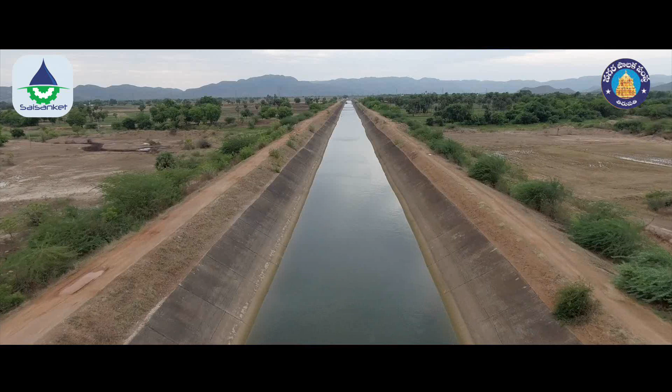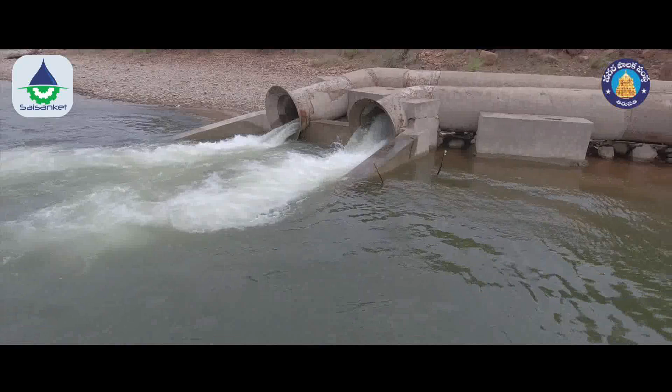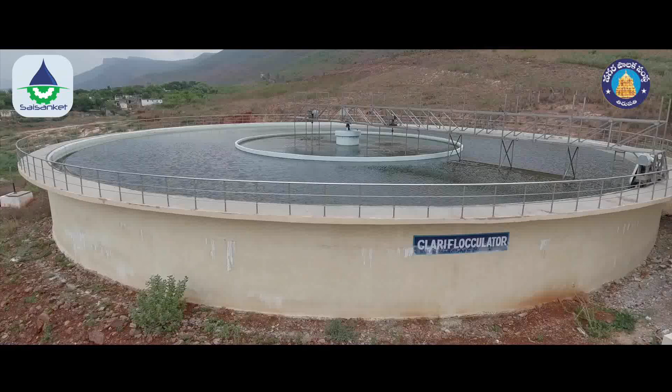The primary source of water supply for Tirupati Municipal Corporation has been Satyasai Ganga Canal, a non-perennial source located about 40 kilometers from the foothills of Tirumala. Water from this canal is pumped and stored in Kailasagiri Reservoir, about 2 kilometers away from the canal. Raw water from this reservoir is then brought to Mangalam Water Treatment Plant located near the foothills of Tirumala through a series of pumping and gravity mains.

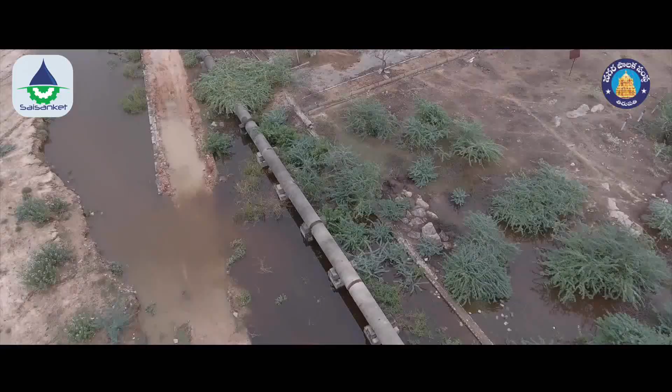The original design capacity of the raw water pipeline was 63 MLD. However, the average carrying capacity of the pipeline has been dropping steadily over the last few years for many different reasons. Loss of carrying capacity on the raw water pumping side has severely affected supply of treated water to both residents of Tirupati and pilgrims of Tirumala Tirupati Devasthanams.

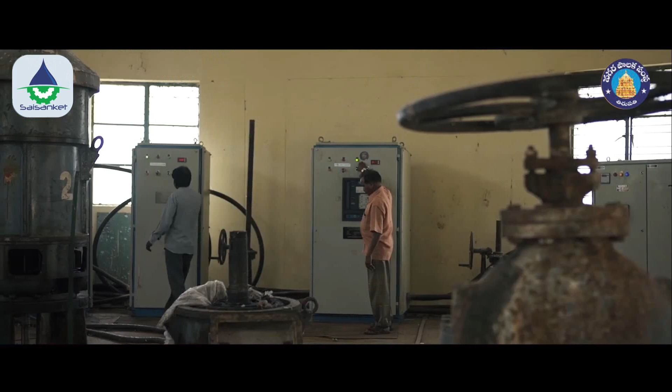The main reasons for the loss of carrying capacity are frequent leakages or burst conditions along the pipeline, breakdown of pumping machinery, and air entrainment from the periodic filling and draining of the pipeline. Frequent leakage and burst conditions in turn are due to lack of a proper surge protection system, inefficient check valves, also known as non-return valves, and absence of non-slam air valves.

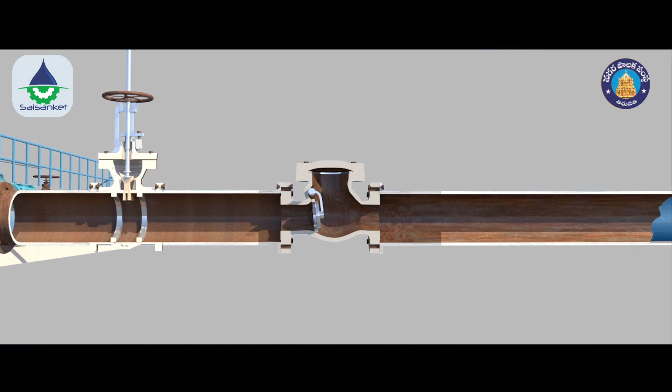Inadequate surge protection system. Every time the pumps trip, the water column slams on the check valves, both at the pump station and along the pipeline. When slam pressures exceed the pipe pressure rating, a leakage may develop or result in a burst condition. In addition, repeated occurrence of slam pressures can progressively weaken the pipeline and lead to subsequent burst conditions.

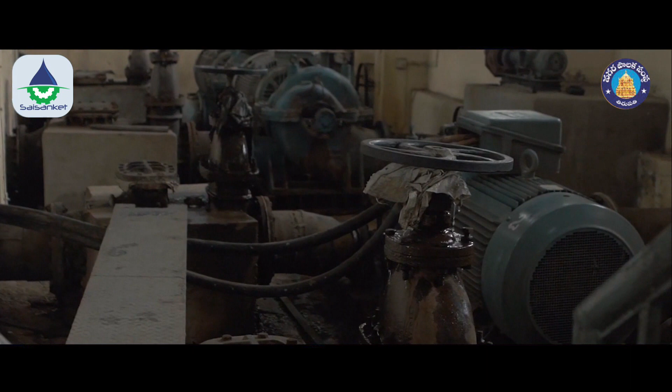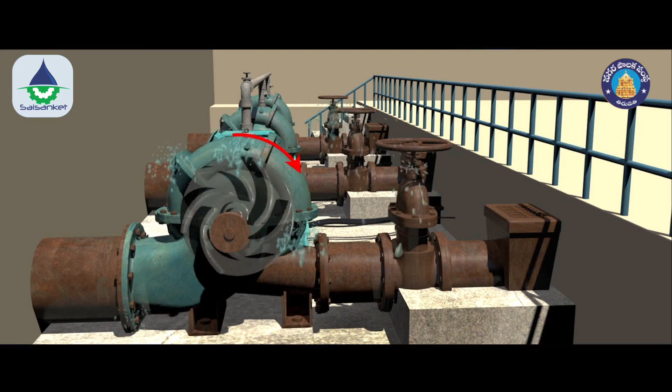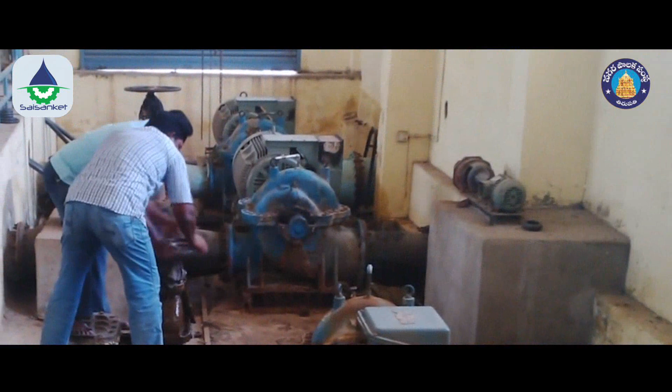Damaged check valves. Conventional check valves get damaged over a period of time due to repeated occurrence of surge pressures. Once check valves stop functioning, there will be heavy backflow through the pumps, resulting in vibration of pumps, loosening of seals and eventual leakage of water within the pump station. The damage can be huge if the operators do not react within 1 or 2 minutes and close the valves.

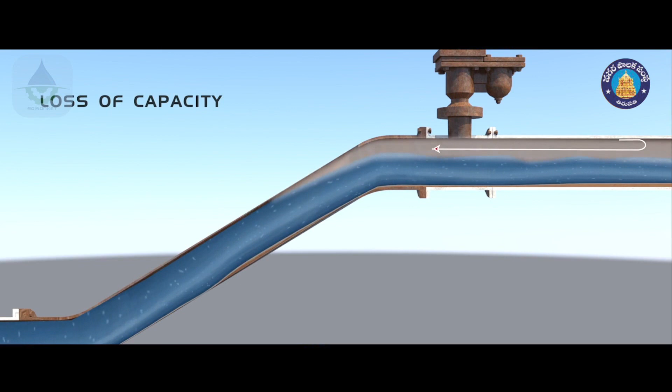Periodic filling and draining of pipelines. Failed check valves and periodic pump trip events result in frequent draining of the pipeline. Ordinary air valves cannot release the air efficiently, and air gets entrapped in the pipeline during subsequent pump start operation, leading to severe loss of capacity. Ordinary air valves will also result in air slam conditions, and resulting high surge pressures can generate leakages or burst events along the pipeline.

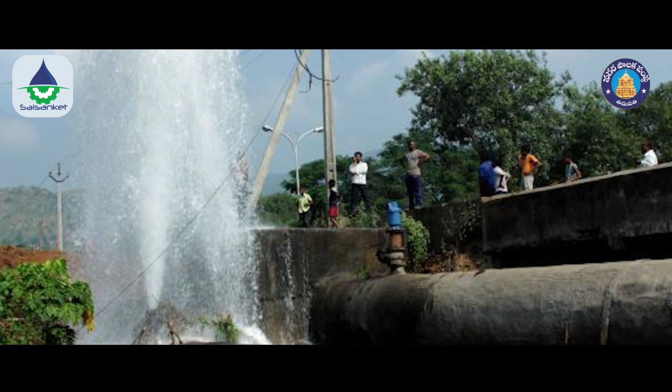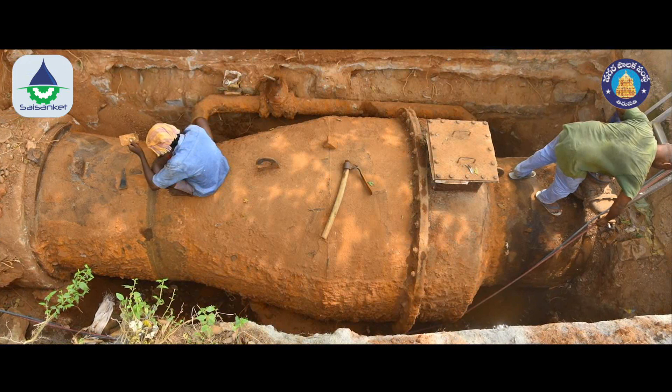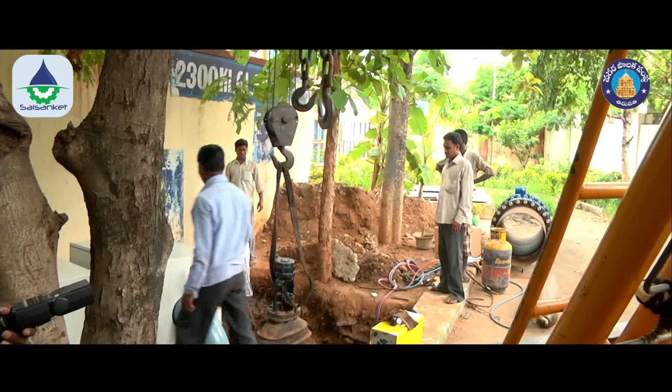Frequent pipe burst conditions. Every time a pipeline bursts or a major leakage is developed, it takes anywhere from 6 hours to 1 day to fix the problem and restart the pumps, causing a disruption in treatment of water and supply of water to consumers. Pipe repair works call for emptying of almost the entire pipeline, and the draining process takes a long time and is often accompanied by loss of precious water and damage to nearby crops.

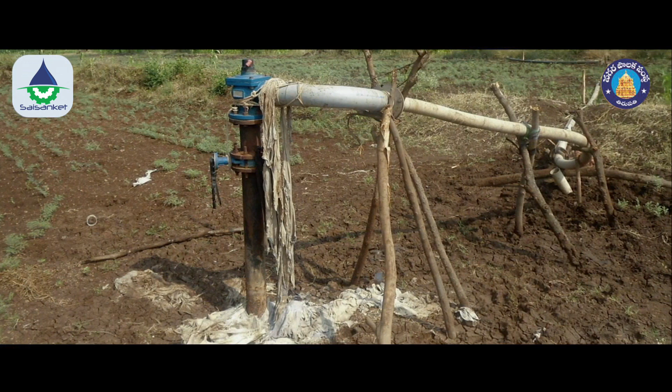Exposed air valves. The conventional air valves are exposed to people who tamper with them and steal water. The air valves may also become non-functional, which will have a negative impact on the hydraulics of the entire scheme.

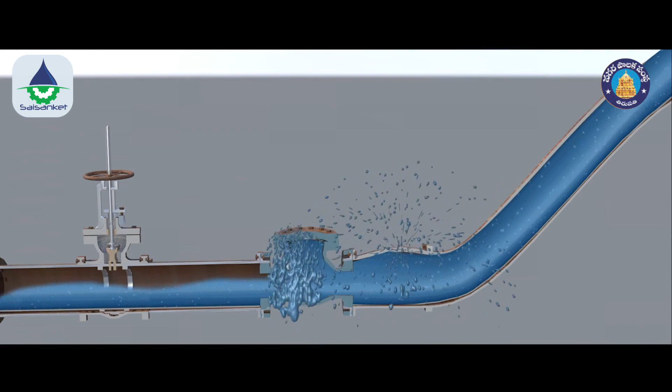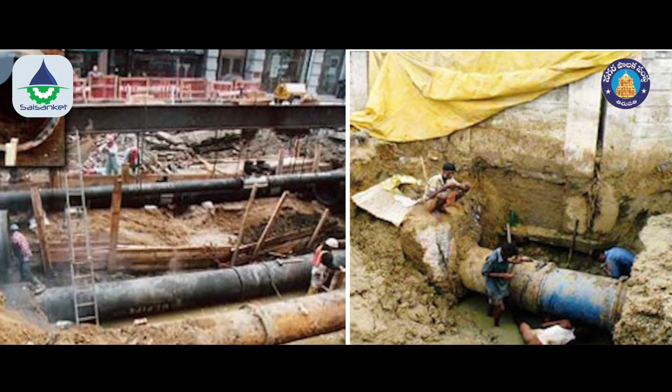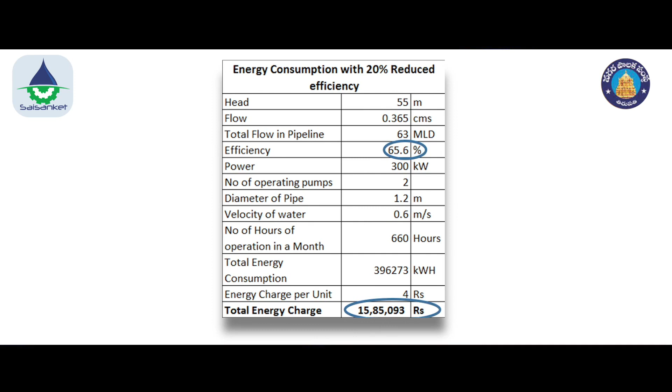These problems are not unique to the Tirupati water supply scheme and are faced by almost all water supply systems in India. In addition to rapid deterioration of water supply infrastructure, loss of capacity increases the pump energy costs. For example, a 20% loss of pump and motor efficiency increases the energy costs by more than 2 crores each year for Tirupati Municipal Corporation.

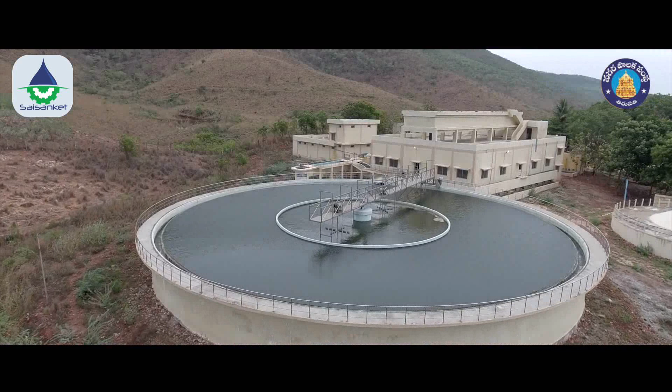The water treatment plant at Mangalam is in very good condition and can treat water at full design capacity once the raw water side of the system is rehabilitated. Treated water is then distributed to various ground level and elevated service reservoirs within the corporation limits, and from there to individual consumers. There are problems associated with distribution of treated water as well.

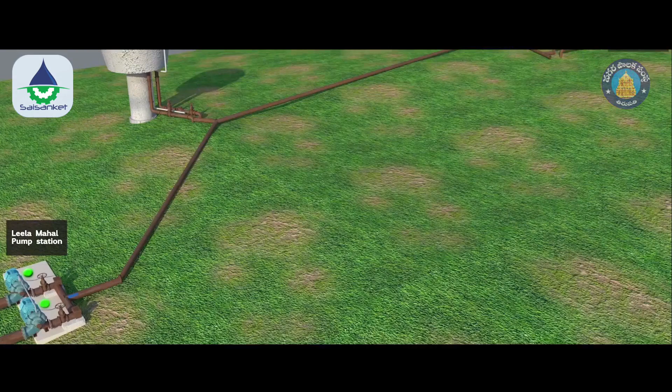In the stage of bulk distribution of treated water, achieving equitable distribution of bulk treated water to ground and elevated service reservoirs is almost impossible, and the traditional method of manual throttling is a very tedious process. No matter how well a system is designed, the inevitable variation in residual heads will distort flow of water into each reservoir,

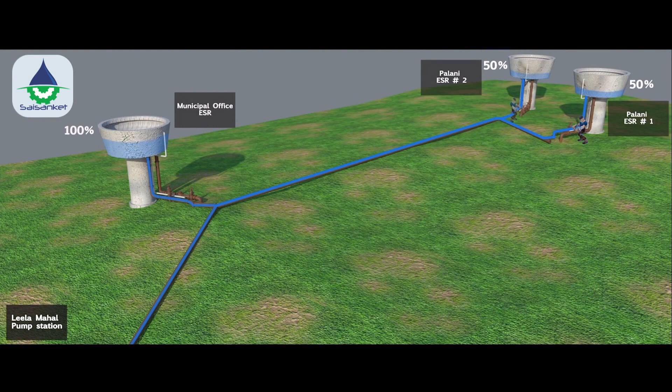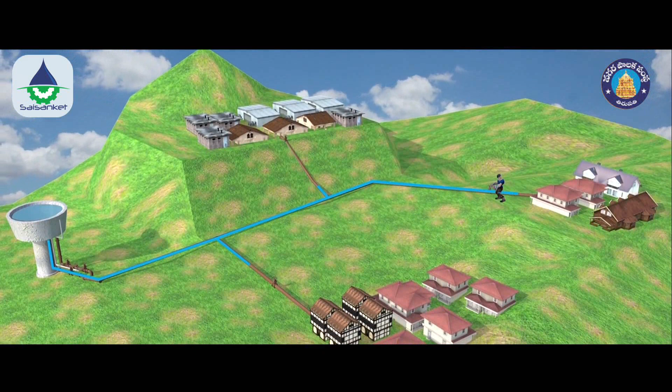which results in inequity. In the stage of supplying water to households, once again, inequity will set in, as flow of water to various households is dictated by gravity and hydraulics. The supply process is done manually, which is also a reason for unequal distribution.

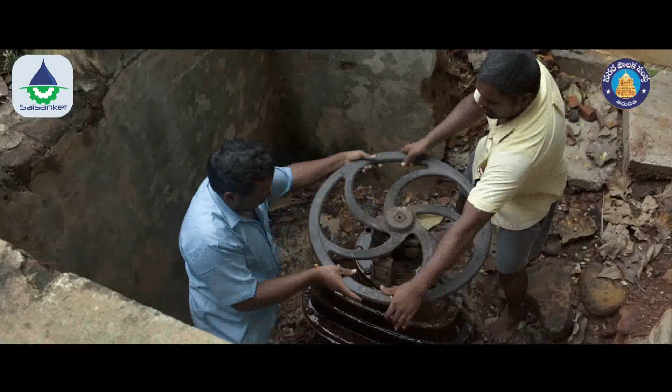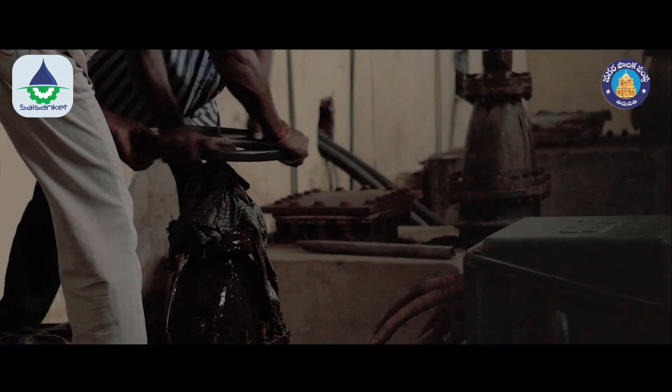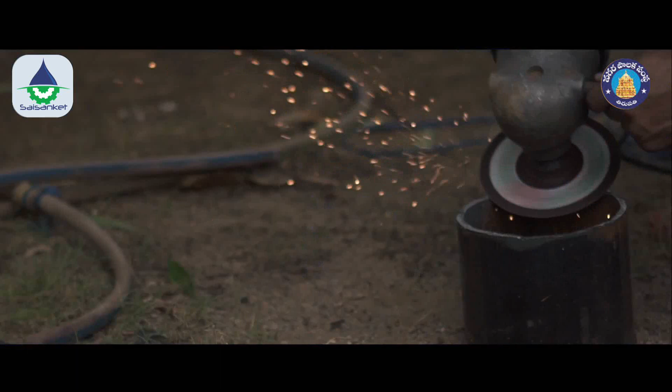Manual operation. The entire scheme is operated and managed manually by untrained manpower and hence mismanaged, leading to many failures of pumps and pipeline. Every failure leads to considerable downtime for repairs and maintenance, resulting in disruption of daily water supply and recurring unexpected and unwanted expenses.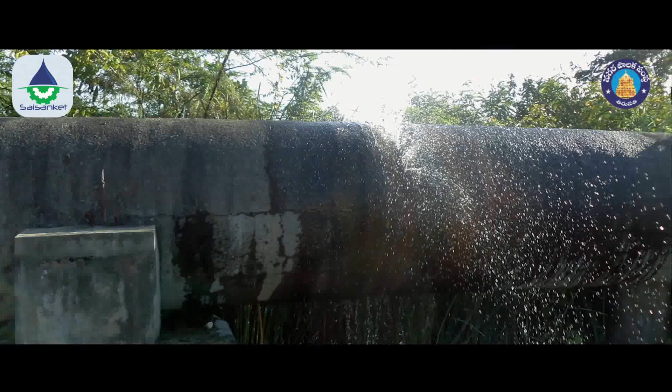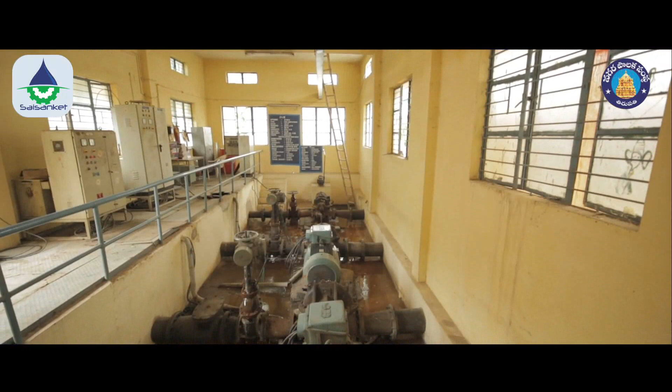Though the pumping machinery, surge protection system and some segments of pipelines are in badly deteriorated condition, the overall water supply infrastructure is still very valuable and should not be abandoned. Instead, a good rehabilitation program can unlock the value of existing infrastructure and strengthen the water supply scheme to original design capacity at a fraction of the cost of building a new water supply system.

Tirupati Municipal Corporation and the Public Health Department have taken up the task of complete rehabilitation of the existing water supply scheme with an aim to restore full carrying capacity of the raw water system and enable assured and equitable distribution of treated water. The rehabilitation work was also based on the most advanced and time-tested technology from around the world in order to prevent rapid deterioration of various components in the future and minimize operational energy costs.

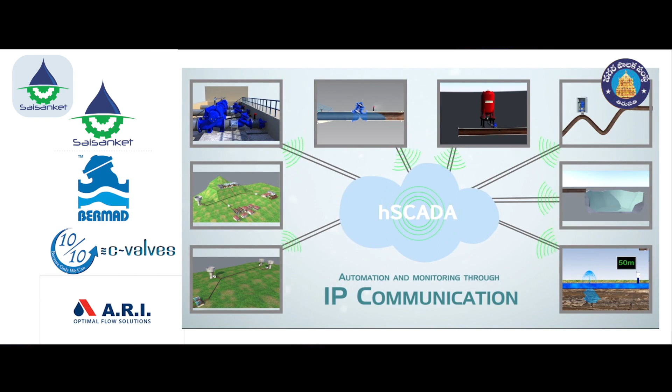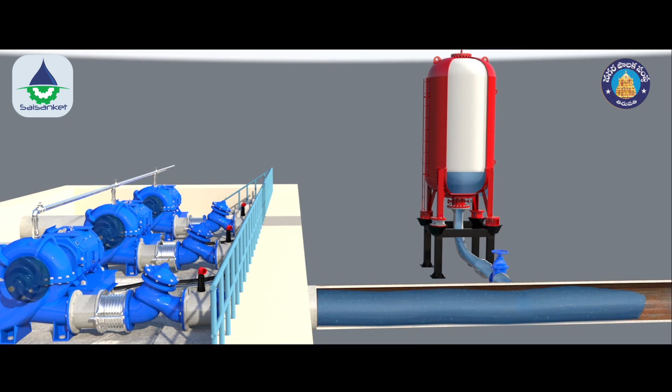Solutions to the main problems pertaining to the existing system are bladder vessel-based surge protection. These maintenance-free devices provide excellent compressed air-based surge protection for pipeline systems. They protect pipelines from both extreme low pressure and extreme high pressure conditions, thereby preventing future leakages and burst conditions, as well as enhancing the life of pipelines.

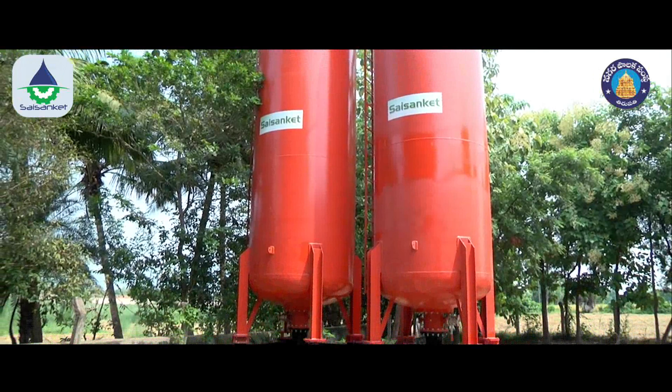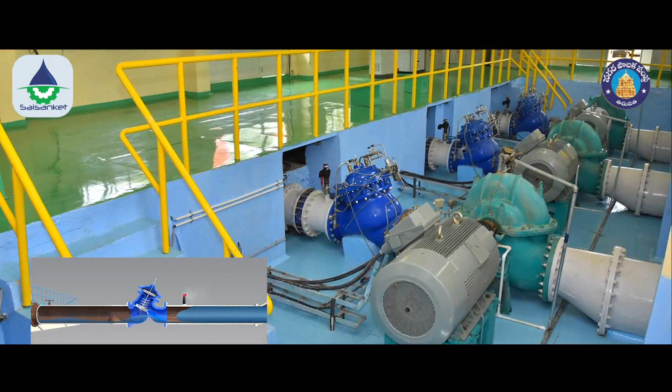Pump control valves in place of check valves. State-of-the-art Israeli pump control valves will replace the check valves to help with smooth starting of pumps and automatic stopping of flow reversal when there is power failure. The sturdy construction of pump control valves makes them fail-safe even under extreme operating conditions and prevents the need for the operators to run and close the isolation valves. Since there is no slam condition, all equipment within the pump station is very well protected and pumps will continue to operate at high efficiencies for a long time.

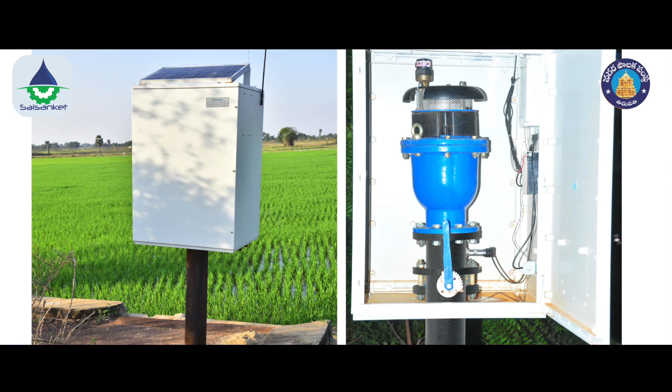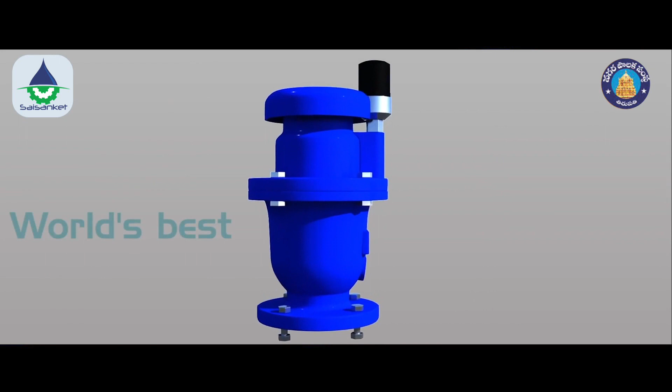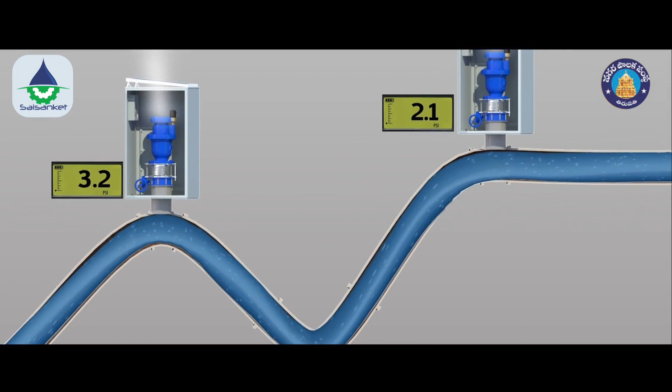Enhancing carrying capacity of the pipeline. Preventing entrapment of air along the pipeline is the key to maintaining high carrying capacity of the pipeline. The rehabilitation work employs the world's best Israeli air valves from ARI that will provide a fail-safe mechanism of removing residual air. In addition, the rehabilitation work involves continuous monitoring of the health of air valves, so preventive maintenance work can be undertaken in case of necessity and keep the pipeline in healthy condition all the time.

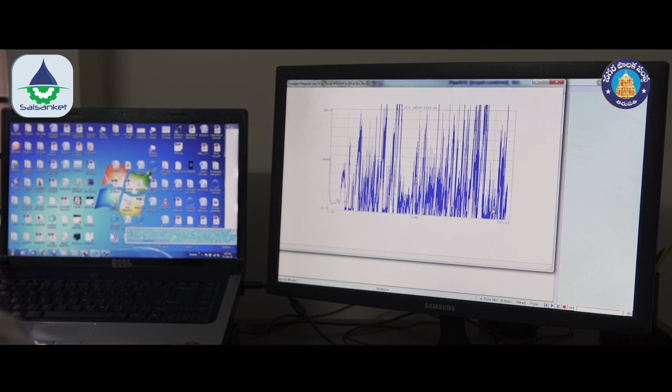Prevention of pipe burst conditions. Pressures will be monitored at each pump station using high-speed data loggers, and that data will be analyzed periodically to determine the potential surge problems. This will address the problems right away before they get worse, thereby preventing future pipe burst conditions.

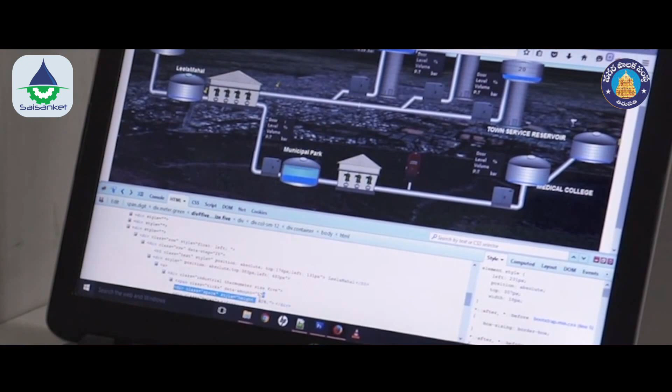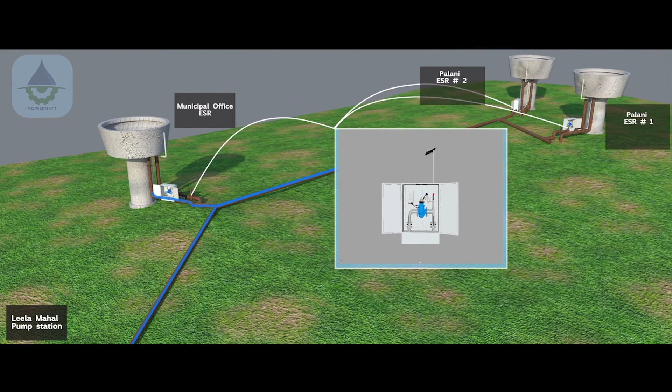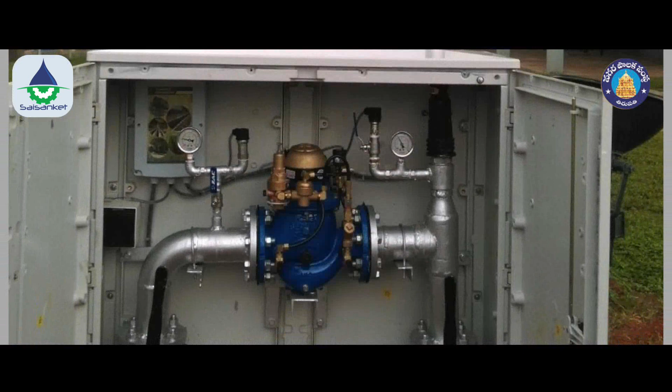Overcoming the inequity in distribution of treated water: installing a Reservoir Management System (RMS) at the inlet side of each receiving reservoir, which automatically shuts off the flow into reservoirs once a designated quantity of water is delivered to that reservoir. And for supplying to households, usage of zonal control valves based on an energy-less hydraulic solution called WDMs, which are set to deliver a certain flow rate and volume for a designated time period. This will facilitate 24/7 supply over a period of time.

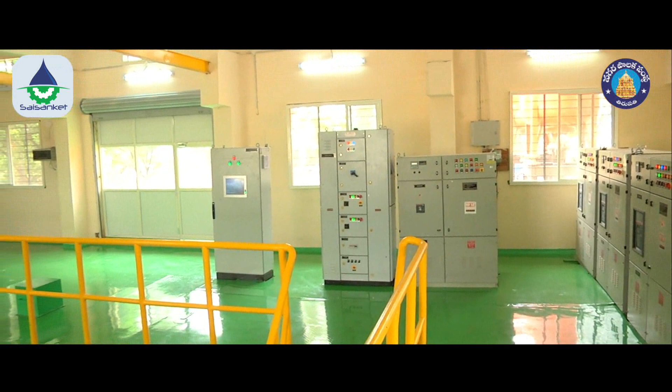Reduction in operating energy costs. Replacement of pumps to bring back full efficiency and replacement of electrical panels for synchronization of pump station operation, which results in reduction of operating costs of energy and maintenance.

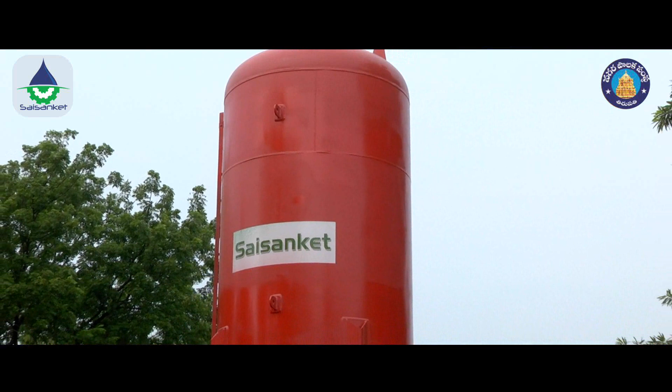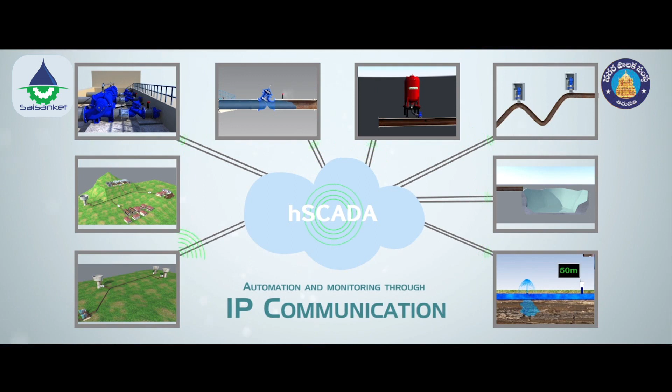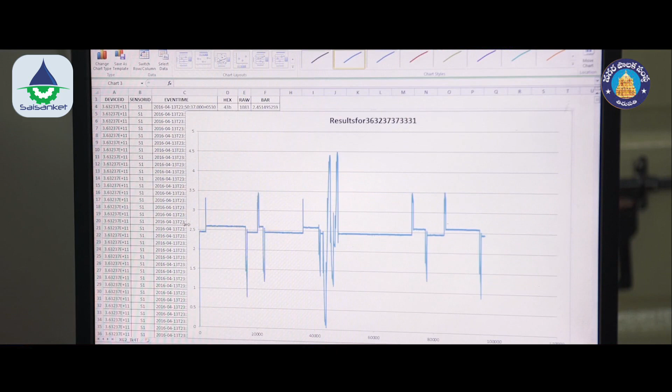Overall project management through continuous monitoring and control. For efficient operation and maintenance, all critical components of the system such as bladder vessels, air management system, and reservoir management system are connected to a smart network. The officials will be able to see the system working on their computers and smartphones and will be receiving alerts, intimations, and on-demand access to historical data. This allows for informed decisions in cases of vandalism, pipe leakage and unintended deficiencies in the system in real time.

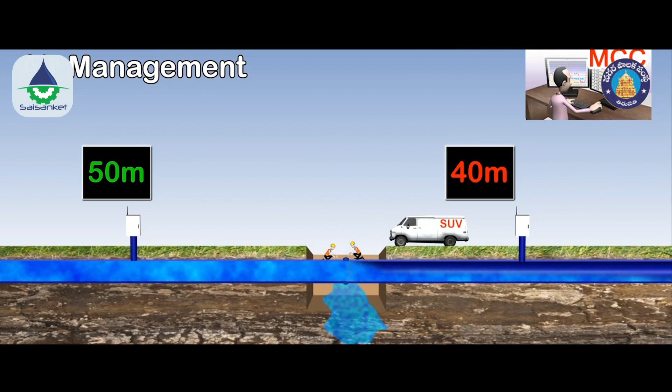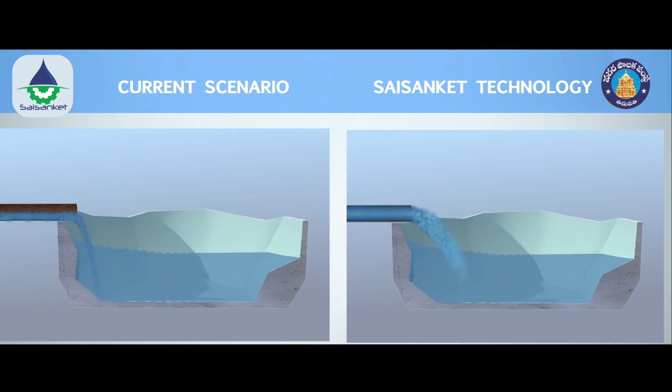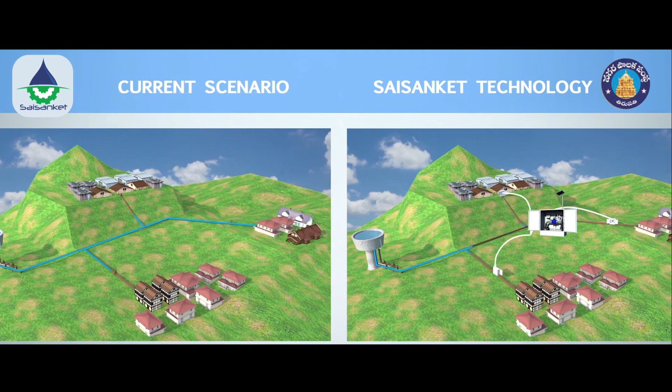With these best water management practices, state-of-the-art technology solutions and smart network tools by Sai Sanket, the Tirupati water supply system can be restored to original design capacity at a fraction of new water supply system cost. These changes will also ensure long-term trouble-free operation. The post-rehabilitation scenario will be a reliable water supply scheme that is fully automated with improved efficiency and assured water supply to the people of Tirupati on a daily basis.

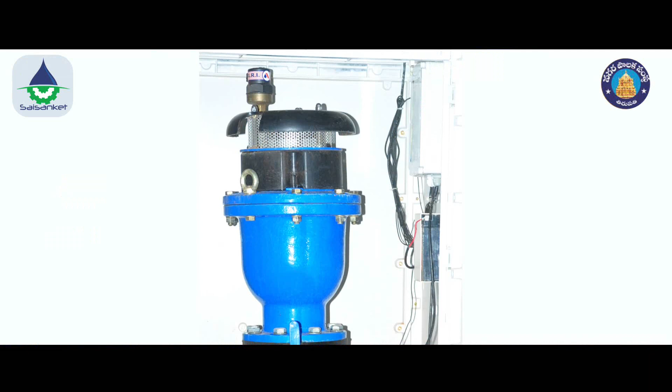The return on investment can be recovered from the savings in energy and maintenance costs within a few years of operation. The additional strengthening measures by way of bladder vessel, pump control valve and non-slam air valve help enhance the carrying capacity of the raw water pipeline by nearly 20%. It would be enough to change the pumping machinery when the need for increased supply arises, implying substantial savings for Tirupati Municipal Corporation in terms of capital improvement projects.